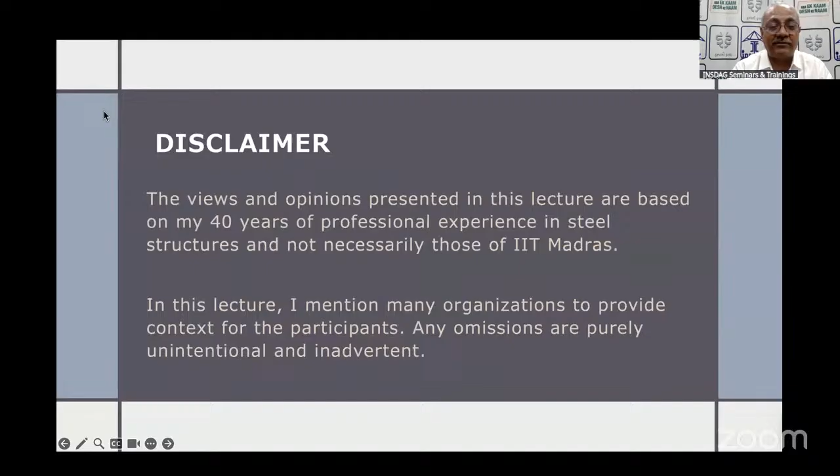Good evening, all the participants. This is INSDAG's 29th year of foundation. During this foundation, we celebrate it with a popular lecture. This time, our presenter is Dr.

Arul Jayachandran. He is a professor at IIT Madras. A little bit of his CV: Dr. Arul Jayachandran obtained his MS and PhD from IIT Madras for his research on the computational stability of steel structures. He worked in CSIR-SERC Chennai for two decades as a scientist in the structural steel laboratory. Then in 2010, he joined IIT Madras, and has guided 16 PhD and 5 MS students on steel structures.

He was a visiting associate professor at Georgia Tech, USA, a visiting senior fellow at the University of Wollongong, Australia, and on sabbatical at SUNY Buffalo, USA. He is on the editorial board of the International Journal of Advanced Steel Construction. He has published over 100 papers in international and national journals and conferences.

In the BIS committee, he is the convener of the revision of IS 800:2007 and IS 11384, limit state design of steel concrete composite structures. He is a member of the design team that won the NHAI Silver Lotus Award for the all-steel flyover at Marathondam. He won the ISTRAC Outstanding Designers Award for designing the Madam Jayalalitha Memorial in Chennai.

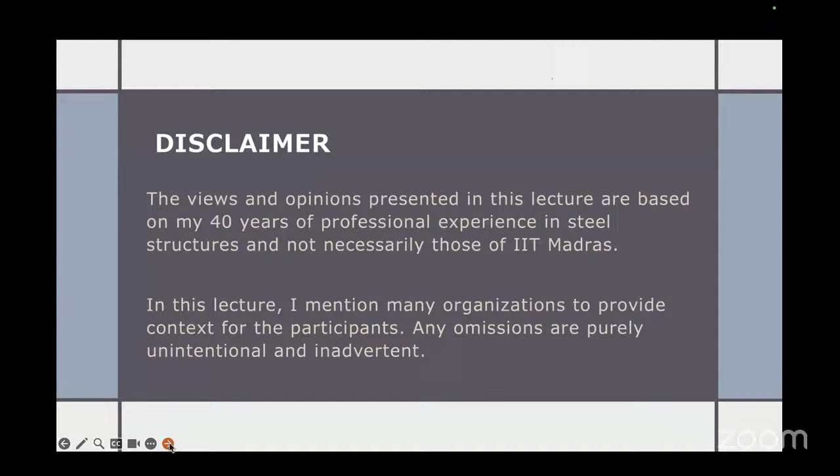Ghosh, all set? Everything is there? Is my slide moving? Ghosh? Yes, sir, it's moving. Okay, sir, you can start now. So sometimes I'm talking to the screen, so I just want to make sure that I'm audible and everybody is.

So first of all, this lecture is made to be more educative to the engineering community, the designers, the engineers, the students participating. I feel even engineers who work in big companies in our country lack a pan view of the whole industry. They do not know where they stand, what the aspiration of the country is, what they are working for, and what the big picture being followed is.

I'm a great fan of Professor Devdas Menon. He used to deliver a lot of lectures to us, and he told an anecdote he had read somewhere. When the Taj Mahal was being built, people were all cutting stones. A passerby went and asked one guy, 'What are you doing?' He said, 'I'm cutting stone.' Then he went to another guy and asked the same question. The man replied, 'I'm building the Taj Mahal.' Although he was doing the same work, he had envisioned what was going to be there. My point is that many young engineers who work do not know their coordinates.

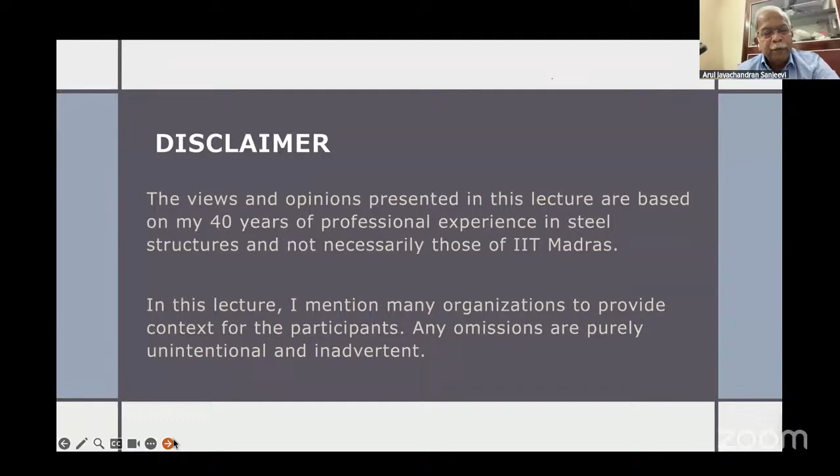Secondly, I might use names of organizations purely for putting context to the people. If I say L&T, then people know how big the organization is. So if something is not mentioned, I would just want to say that it is purely an omission, unintentional, and I ask your pardon.

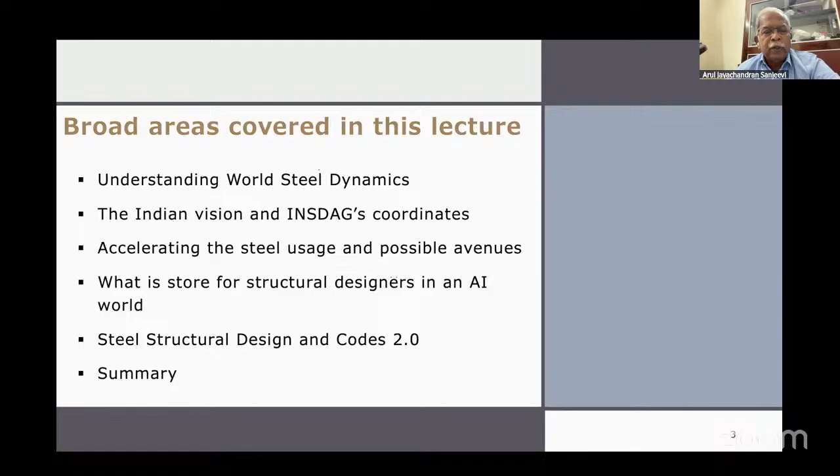I would like to have not too many topics, but a broader picture of what the industry is going to do. First, I thought I will help you understand the world dynamics, and what is India's vision, and whether a possible acceleration of steel usage is achievable. Of course, the point on AI we will discuss at the end, and what happens to the codes going forward.

Okay, so understand the steel dynamics. Is it visible now? Can I go back and have another look? Probably the one I'm showing is not the one I intended. Can I stop sharing and go back? Certainly, sir, I will stop share. Let me go, please.

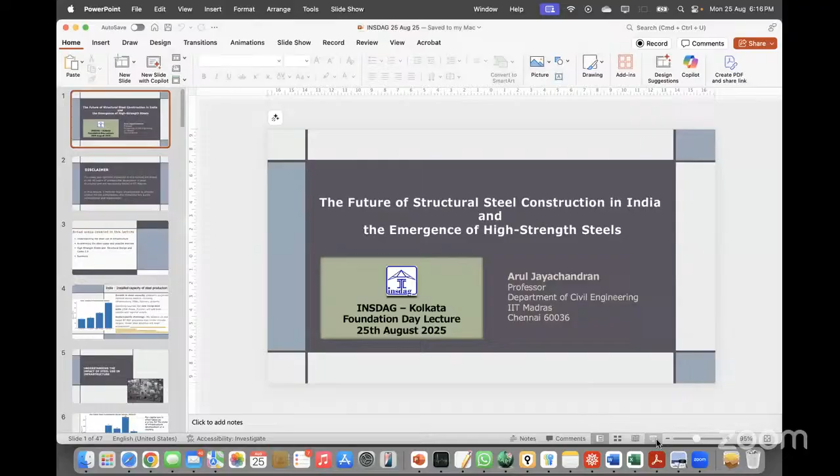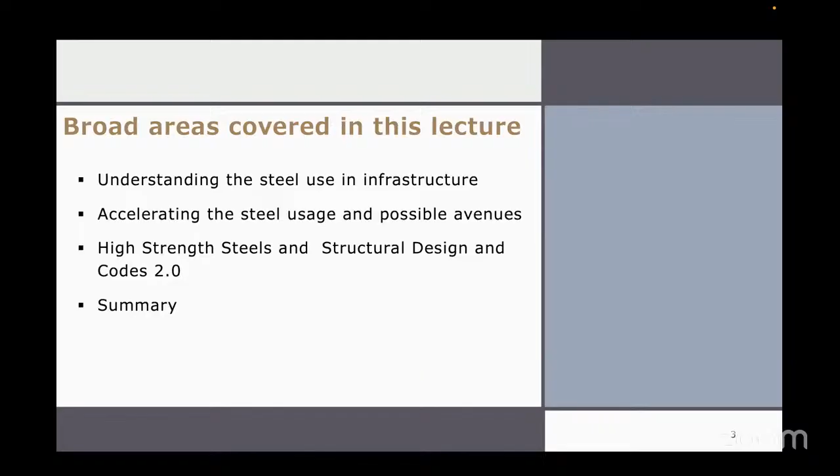Very sorry about these things, I had too many versions of the presentations. So first is understanding the steel use in infrastructure. Somebody has to mute. Okay, secondly, accelerating the use of steel and how high strengths and the new codes of practice come in, and finally the summary.

Now, what is the installed capacity of India? We always want to grow. Right now we are at about 200 million tons per annum capacity. When the demand comes from housing or infrastructure, PEBs and the like, the production is going to be high. We also see new ones being planned, like the JSW POSCO joint venture.

But one thing is there: we always go by the BF route, the blast furnace, basic oxygen furnace process. When I visited Scandinavia, I don't want to name the country, but they are producing what is called green steel, which India is also doing many initiatives towards. But what worries me is we have developed to a great extent in the BF and BOF process, and we are almost self-sufficient in production.

I'm really afraid that any climatic issues may lead to non-trade conditions coming into our steel industry. I know the country as a whole will confront that, but I'm a little worried we have to gear ourselves up for an eventuality of things related to climate, either in trading or use of steel. India must be ready within another 5 to 6 years. That's my personal opinion, because people are going to comment about the BF and BOF process, and we have enough potential, so we should get into that.

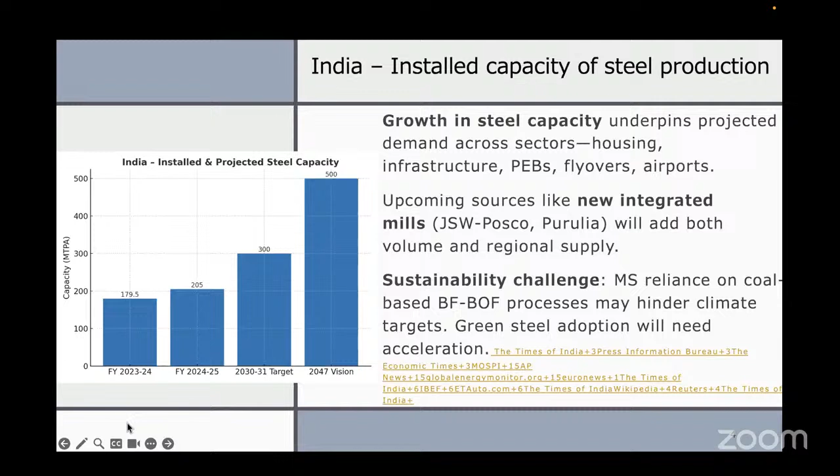Why do we have an obligation to be with INSDAG towards our country? Those are things I want to say.

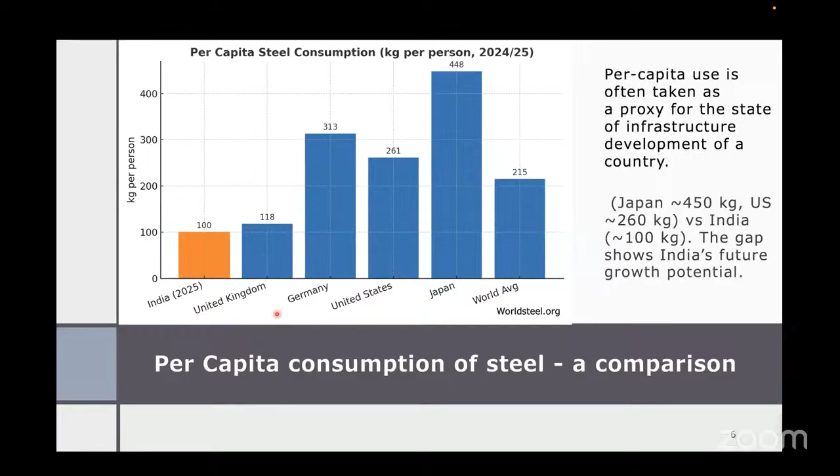Having given a little idea about per capita consumption of steel, there is common acceptance that every country who wants to sell more steel has specialized networking organizations. I wouldn't call it an institute, it's not an academia, it's not a group of scientists, but it is a passionate kind of people who are really interested in expanding steel construction and the aspiration of the country. If you take Europe, the ECCS is very, very strong. There are some steel producers who have their own institutes, but still the European Convention for Constructional Steelwork provides a lot of conferences, material, and the codes of practice support material, everything.

Of course everybody knows about SCI. In the 1970s UK went through a crisis very similar to what India went through in the late 90s, and so they systematically went and formed the SCI, which today has grown big. In the past we have worked with SCI, and I'm sure we'll be working with them now also. Of course BCSA has a little historical background too. The American Institute of Steel Construction - amazing people - is primarily run by the fabricators and the steel producers, and they do very systematic work. We also have the Canadian Institute, the Australians, the Chinese, and the Arab and Middle East Union. So there are specialist organizations that integrate the industry.

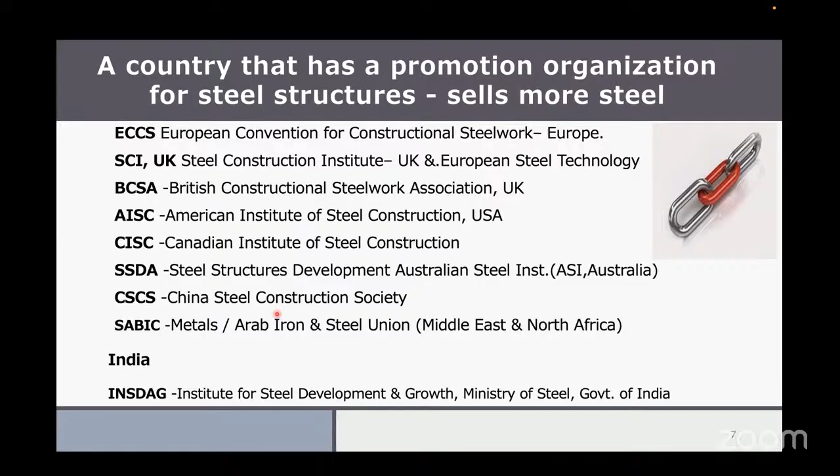In India, we are fortunate that from the mid 90s we have INSDAG, the Institute for Steel Development and Growth, under the Ministry of Steel, Government of India. Primarily this is an organization which has the wherewithal and capacity to reach out to the masses, from different stakeholders - may it be designers, end users, fabricators - all can get something from INSDAG. So I would say INSDAG has been a great organization, and it is my duty to mention that.

And also I would like to show you the graph - this is per capita consumption of steel. When we started in 1991, it was something like 3 or 4 kg. This data shows that we are at 100 kg per capita per person now, but we were like 3 before.

Around 91, 92, India moved from an administered pricing regime to an open market pricing. That means earlier, the price of steel was a regimented one. The government had a few organizations who would calculate how much steel is produced and how much is the demand.

So they fix the prices. There is no proper, I mean, the real market push-pull forces which come into it.

So later, INSDAG was formed in 1996, if I'm right, and it is there for us to see that there is a great growth after the inception of INSDAG, and we have now reached about 100 kg per capita. I'm not attaching the entirety of this effort of the steep rise to INSDAG alone, but I would like to make on record INSDAG was an integral part of government's every step towards that.

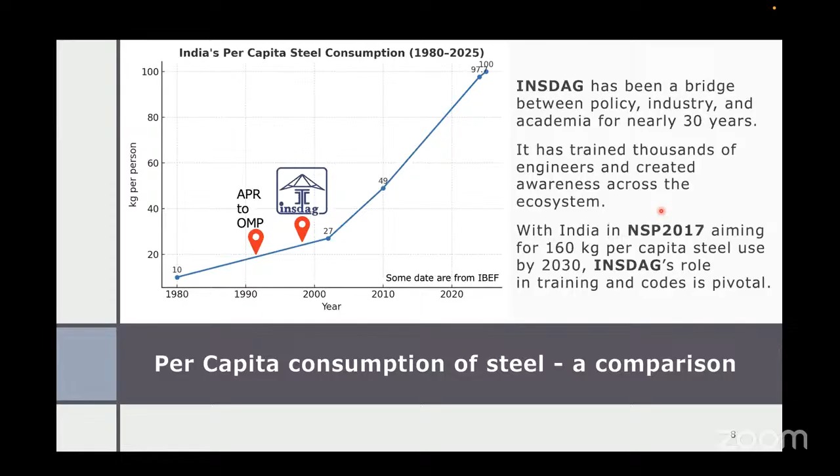A little bit about the people who were young then have gone through INSDAG. It was established in '96 when there was a very low uptake of steel, and we went into the open market in steel policy, and the need for a specialized organization was felt, and INSDAG was formed.

I'm very happy to say I'm one of the founder members of INSDAG. The first DG was Madirata, and at that time, Professor Narayanan from SCI UK was here, and Mr. Narayanan from the Steel Ministry was guiding INSDAG through Madirata, who contacted Professor Narayanan from UK. Narayanan put together Kalyan Raman, myself, Professor Shanta Kumar, Dr. Sita Raman, Professor Satish, and Dr. Sendil — he made a team, and we did the initial work.

So the early outreach by INSDAG for awareness of architects, popularizing steel construction manuals — all these things, we were very happy to be part of it. I have seen many young engineers at that time, at my age, and we used to run around.

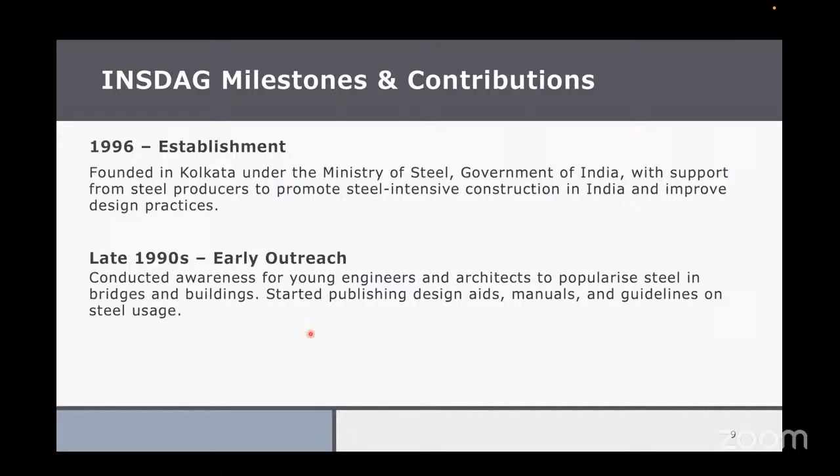Once we were going for a lecture to Coimbatore, near a place like Coimbatore. I was in the train, and Manoj Ghosh came and searched my compartment to make sure whether I was available. So we had fun traveling and teaching and creating awareness.

In the 2000s, it graduated further because composite construction came in a big way. There was awareness about IITs and CSIR labs, and INSDAG started coordinating with them. After that, in the 2010s, they started having their own design books.

First of all, we should understand — they have all the wherewithal to collect all the technical information and disseminate it to us. So per se, we say there is some technical excellence available. Is there? They are people who can get your expectation of technical excellence from somewhere, right?

In the 2020s, they did lots of seminars and worked on prefabricated and modular construction, and they were also part of discussions on smart cities and affordable housing — I will come to the point on this. Every year they conduct a competition for architects and engineers, which is very popular.

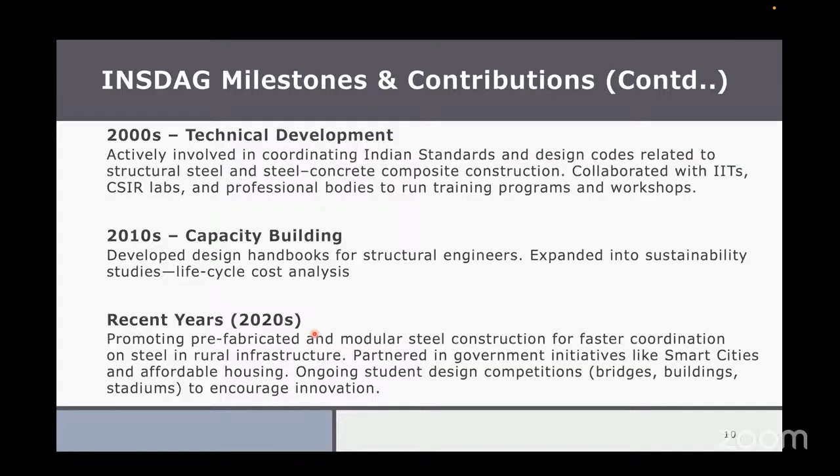My students have twice won — one of my students won first prize as a single entrant, and another three students got the third prize. It is very popular even among students. Kudos to INSDAG, they still maintain it because this is a difficult logistical exercise, and they have been doing this.

So there is my own introspection about INSDAG. I would like to say it is an organization started as a promotion for steel construction. Initially, it fell into some crisis of identity because some of the patrons were looking for their own benefit — is there any increase in sale?

It was too early for INSDAG to have taken that burden. I was also part of it, which says, oh, one day we will do it. So initially, it was on the expectation side. Secondly, INSDAG was seen as a solution provider. But even in IIT, we don't have solutions to all the problems of stakeholders — neither does INSDAG.

But they, as I told you, they are capable of getting that information for you. So I was sad once even INSDAG was pushed to take up even design checking, an organization pushed into design checking, which was too much for an exec. So I would say, as an outsider, those were the things we were really struggling with, INSDAG helping and things like that.

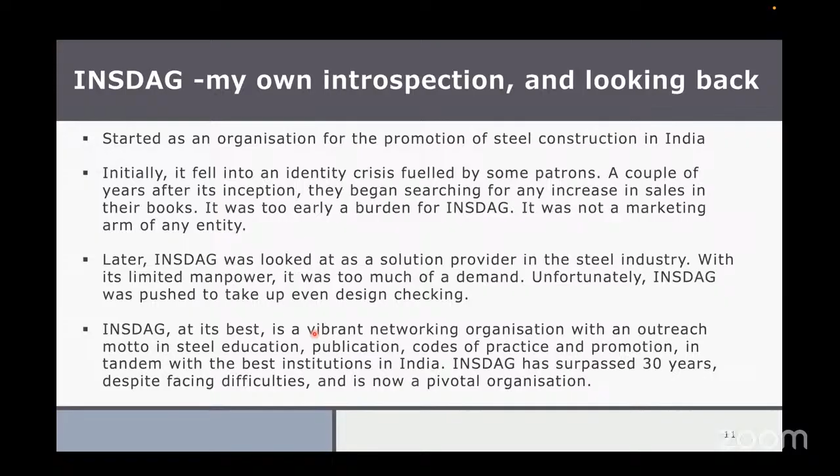Now everything is fine. We are doing most beautifully. It is my opinion, and now it's a vibrant networking organization with a motto of steel education, publication, codes of practice, and promotion. So, in tandem with the best institutes of India, they're a big mover of steel construction in India. Now they have surpassed 30 years, despite facing difficulties. Now they are a pivotal organization.

So, Misra ji, I give my claps. Congratulations to your team. I could see this picture put together - I see my old friends, Manas, A.K. Samantha, Arjit Guha, and of course I don't find the other names there. A wonderful team doing really good work. Your vision is to make our country great, and it's definitely my big congratulations to INSDAG, and I'm honored to deliver this talk. Thank you, Ms. Raji. Okay, thank you sir, thank you sir.

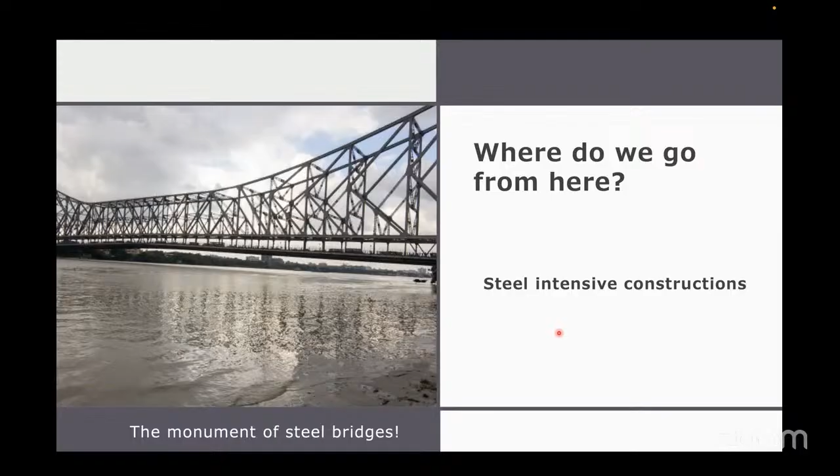I had the big fortune of walking its entire length - we have a small cabin monorail under the deck so we can go into it. So it was a very nice exercise, I went down. So the question still links: where do we go from here? Because what is in store for us?

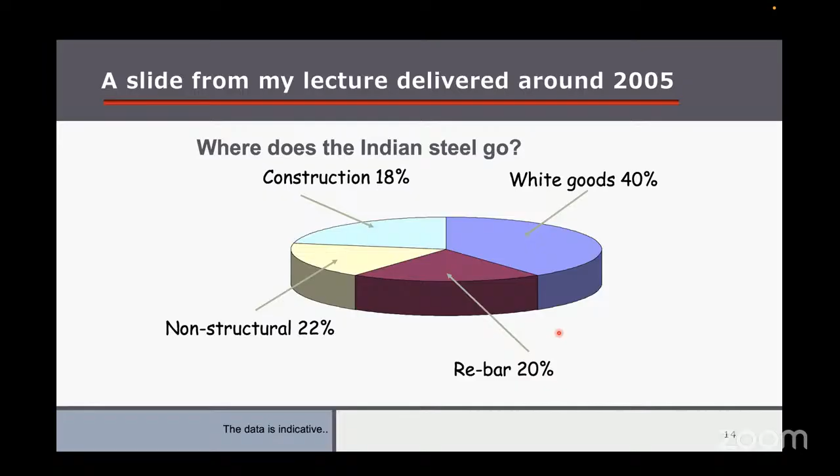But today, the steel consumption we are looking at for 2030 is a whopping 62% from construction and infrastructure. You can say the 10% automotive is there because the pie has become very big - the pie has become very big. Of course we should be doing more on defense, but this is our future for 2030.

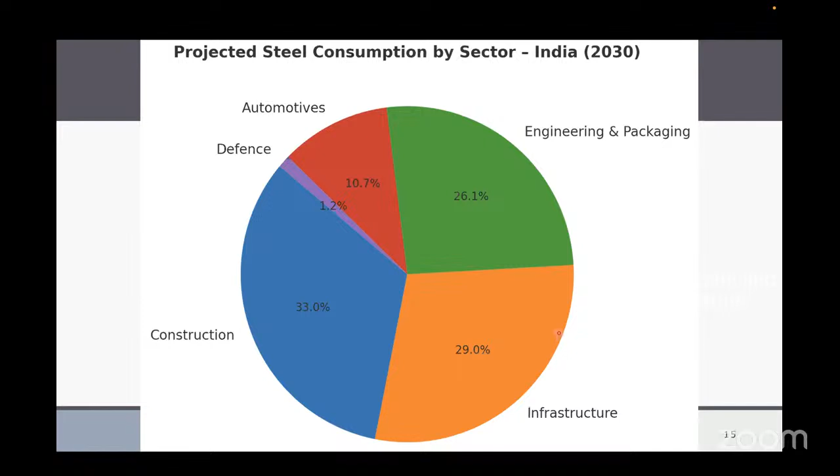Definitely, we can always work and coordinate more on the defense side. So this is a big, big leap from 18% to about 62%, about 4 times that. So what do we have to do - that's my question. In my own opinion, I'm not saying I've solved the problem of the world, but I can give my professional opinion of what can be done to bridge the government of India's big aspiration and leap in the usage of steel.

Okay, so this is black and white, right? The grand challenge in steel construction ahead of us - the national steel policy is set. As you can see here, it aims to go around 160 kg per capita. So that's from 100, another 50% increase. Now, how is the roadmap?

You might have read about Gati Shakti, which has 7 engines that drive growth. And if you break them down for the steel sector, it's very nicely laid out. If at all we want to grow to around 160 kg per head, then our first priority is construction and infrastructure, engineering and fabrication, automotive, and packaging. There are minor contributors, but the major chunk comes from construction and infrastructure.

Now you can see here, it starts with steel, oil, highways, bridges, airports - all of them have to contribute to that, because this has been arranged not just as an enumeration, but in a thoughtful way.

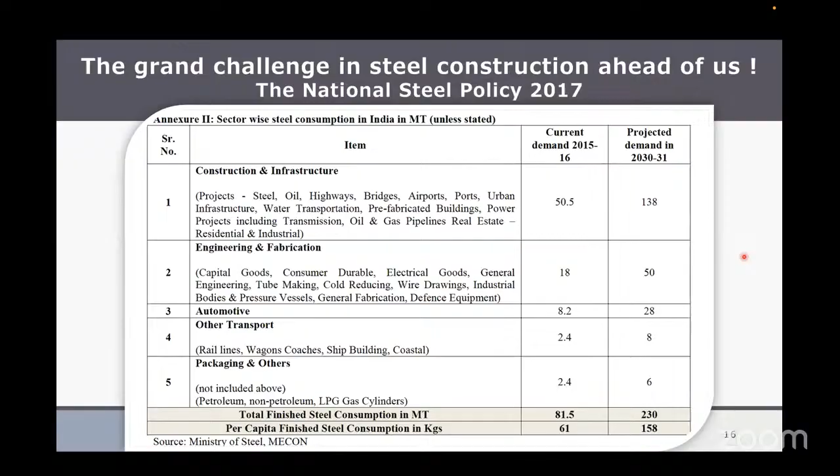Let us see one by one how we can do this. My first question is, can open web steel girders or plate girders increase steel consumption? This is the first question, because the die is cast—I know where to go, but I have to find how to go, or what else I need to do.

Now, if you take open web steel girders and plate girders, it's primarily used in railways. They were the major consumers of steel for a long time—in the British era, even after that, even after independence, and we set up several steel mills by government funding.

After that there has been big use of steel in railways. Now my question is, can the same thing boost our consumption? I'd say the doubling of tracks, which is announced in every budget, and new alignments, if adjusted and funds allocated, only those increases can bring in consumption of steel. So probably most of the rolling or track stock is in a stage of maintenance, but new things come only if there are new alignments and doubling.

But one hard truth we have to accept: prestressed concrete has definitely been used as an alternative, in many instances—not just one or two. In such cases, even for the ROB portion, steel is considered most of the time—either as a plate girder or as a bowstring bridge. These two are the options being used.

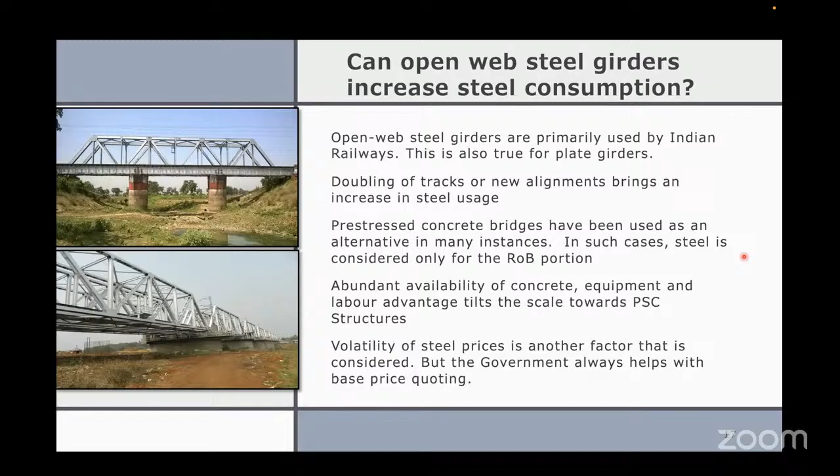Another thing is the volatility of steel prices. People always talk about the volatility, but in a government project, it comes with support—you do base pricing and then cover the markup. So there's a bit of smoothing, it's not all that negative with steel being used. But I'm not very confident that the open web girder systems used in railways are going to bring us more consumption.

Secondly, my question is, can industrial structures increase consumption? Industrial structures are basically synonymous with steel only—concrete being part of it, but mainly steel at every instance. They have some constant share of steel being used in industrial structures. So unless we get new industrial conglomerates with heavy usage of steel, we're only seeing a few at this moment. So the point is, industrial structures do use steel, but will they drive the demand?

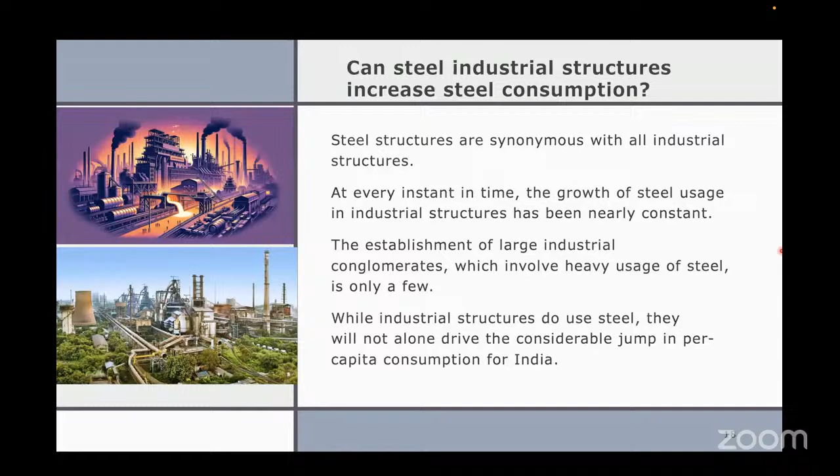I would say no, or the possibility is very low. Industrial structures only come up when there is capex and companies want to invest, and industrial is not a big driver of that.

So the third question is, how about the PEB industries? I am really excited about these PEB industries. They're doing really well. I've been part of this PEB industry for nearly 25 years. In the year 2000, we had a conference in Chennai, and at that time I first saw Kirby people and the Australian Tata Blue Scope, though it was a different name then before they changed it to Blue Scope. They made a presentation about pre-engineered buildings. I still remember it was about 100 people. From there, after Kirby landed, we have widened, and the PEB industry has been a big promise for steel growth.

So if you take the current market size, it's about 1.84 billion US dollars. By the year 2030, if you project it, it's going to double. Definitely, because the reason is they are not just enclosures.

We can see the seventh engine, our Gati Shakti, which is the government of India's long-term infrastructure powering plan. The seventh engine is logistics infrastructure, so the drivers are warehousing. Now there's a very interesting concept in warehousing - not everyone has to have their own storage. There are common storage spaces given on rent. The aggregator of services will provide logistics of putting in and getting out, and you can share the space. This is very exciting for me, because a person who produces need not have a space of his own. This is a new concept.

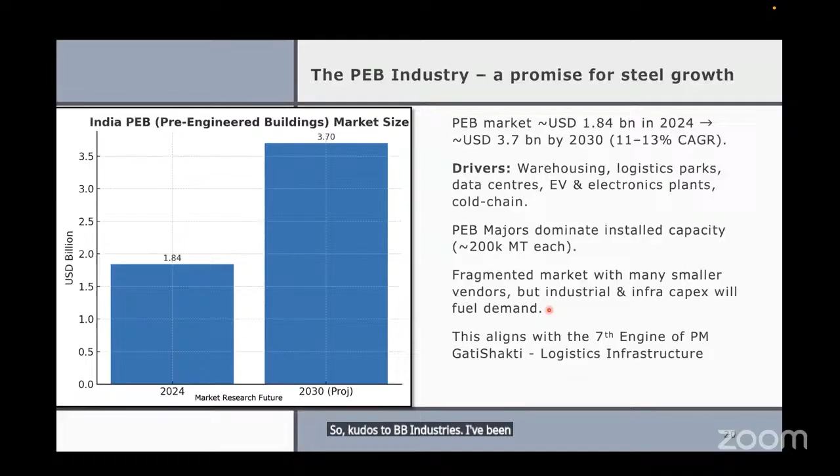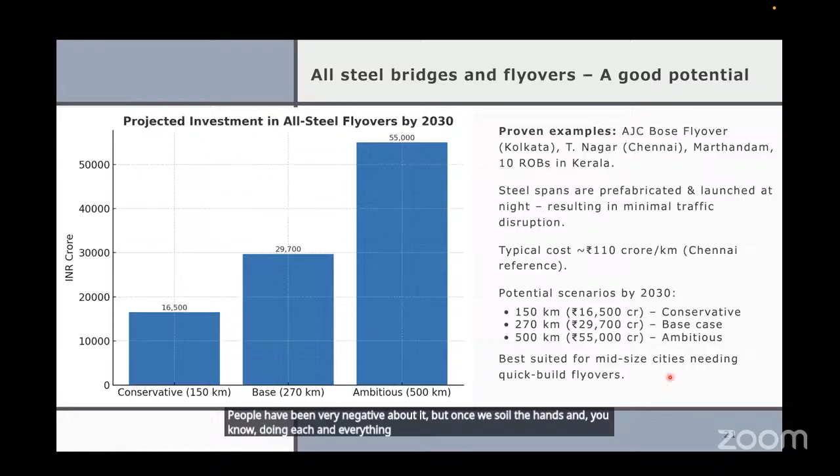You will see in a while. When we took up the challenge of providing a flyover in a very narrow space, people were very negative about it. But once we got our hands dirty doing each and everything, we really understood it's a good concept that may be adopted. Let me go into that concept.

This is the first photograph we took, I think from the Hooghly Bridge River Corporation, correct, Mishra ji? Is this the organization? I took this data. Is that right? Yes, sir. The name is Hooghly River Bridge Corporation. We went and fished through all the old documents, and they're very fantastic.

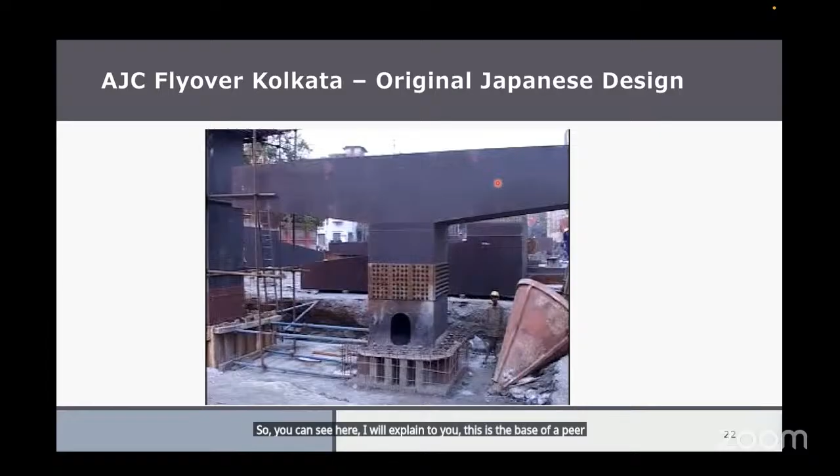This is basically a Japanese design. You can see here, I'll explain: this is the base of a pier, and the pier cap is in steel. This is the AJC flyover. What amazed me is that at that time, they had a plate girder - this is a steel composite bridge.

And for the obligatory span they used a box girder composite, Mishra ji, am I right? It's still, because this is an old photo and I took my own photo, the place is still buzzing with activity. Yes sir, it's completed now, long time back. This is a construction photo. So this is our inspiration.

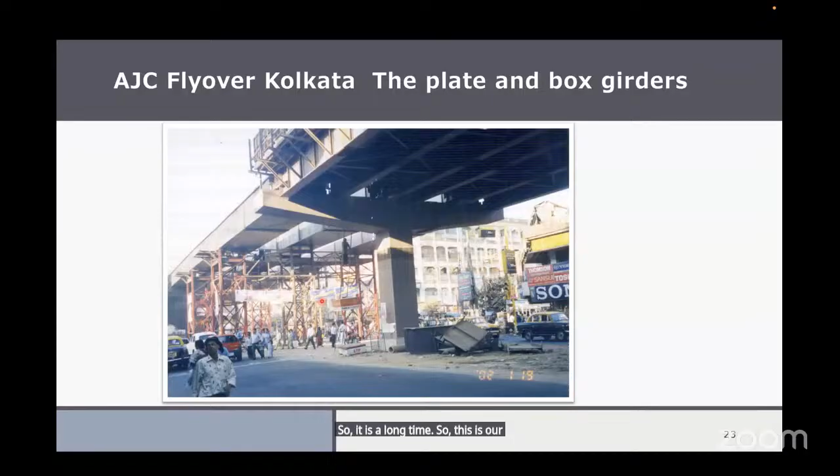We learned that this flyover was designed by Yachiyo Engineering Consultant, and L&T was the EPC contractor, with the superstructure using a box girder or prefab girder segment.

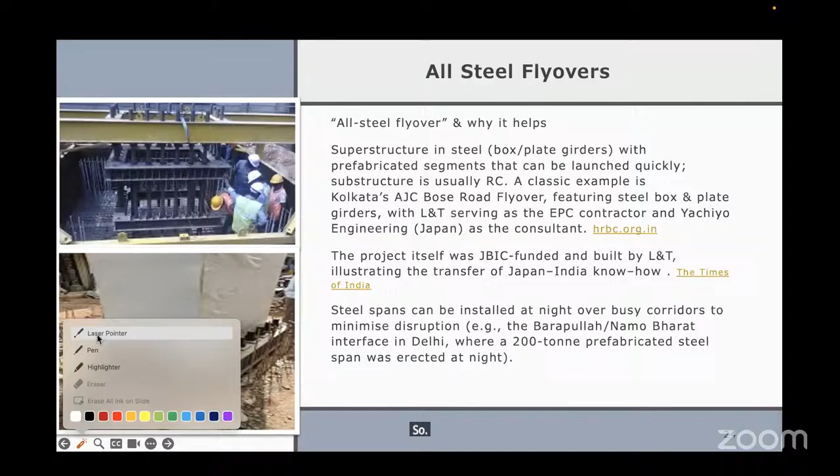Let me explain how this concept is viable and how it can be used. This is the space where the pile cap comes, and inside the pile cap we embed what is called an anchor frame. The concept of the anchor frame is very simple and ingenious: there are rods with a nut here, the rods go from here down to the bottom, where there's another nut, and it extends up to the top.

When we fill it with concrete and there is a downward compressive load, the top nuts transfer the load. When the load reverses, the bottom nuts transfer the load onto it, and the load disperses accordingly - if there is an uplift, the load goes the other way.

This is embedded into the pile cap, and you can see there is a small frame coming into the pier cap. These are the anchor rods which are projecting out. The diameter is about 80 mm, sometimes we have used 90 as well.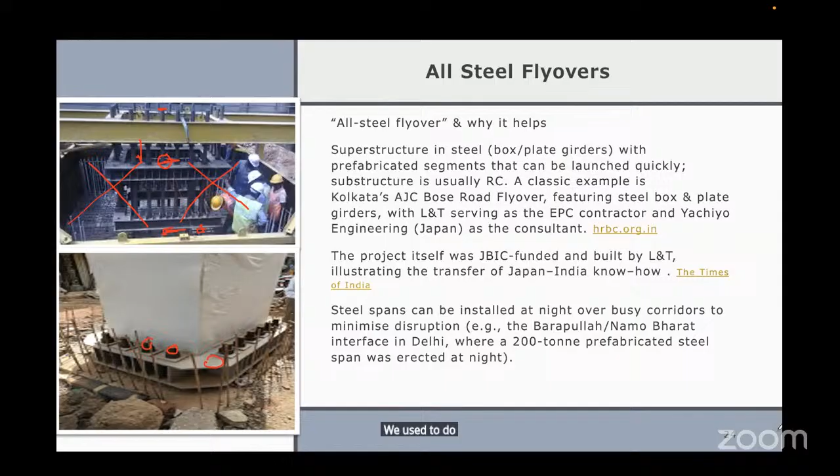This is an example you can see here. This is the pier, attached to the anchor frame. Once the pier is made, which is of steel, the entire area is usable - at least two-wheelers and smaller vehicles can go, and even lorries and buses can go, with minimal disruption to economic activity.

So first we block the road for the piling. Once the piling is done, the anchor frame is cast. Once the anchor frame is cast and cured, we place the pier, and that's it - we remove that place for traffic.

Now the pier cap will come in. We have a handhole in the bottom of the pier cap, so it is set, and the bolts are inserted and torqued to the right value.

So it is a very simple operation, and it can be done with low weight cranes. In a day, you can do about one or two. The initial bolting is done, and then we go torquing.

What we have done in T Nagar is just going to be over. It starts from CIT Nagar and will end at North West Mount Road, where Dr. N. Subramaniam's house is - sir, we have a bridge from CIT Nagar to your house. Also Marthandam, and Kerala had 10 flyovers given by RBDCK, basically funded by KIIFB. All of them are there, and the last 4 are being released.

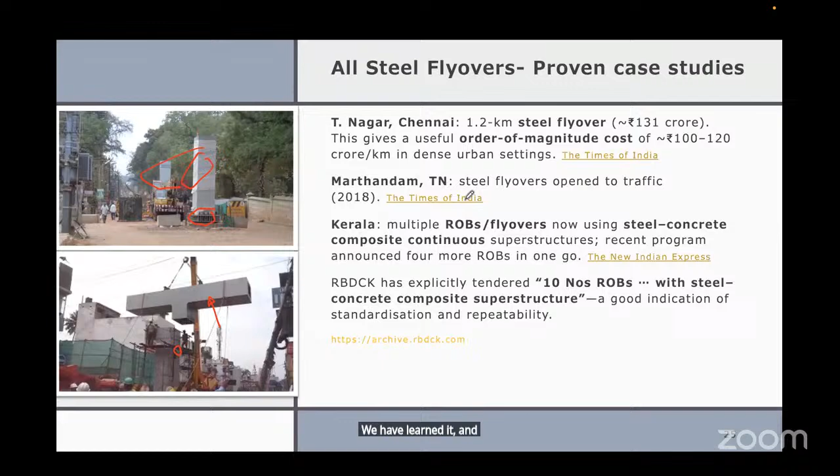So the concept is well tested. We have learned from it. Right now, after this, only plate girders arrive - it's not basically a stick construction with stone. The girders arrive and go on top, arrive and go on top. So it is very easy to construct by the stick method.

For example, in the case of India, suppose if we think this is an option - India has about 4,000 cities, and in India, the urban population is going to be about 607 million. So tier-2/3 cities will definitely need upgraded infrastructure.

Right now, a lot of second and third tier cities are there. Let's say we target about 75 to 100 mid-sized cities - tier 2, 3 million plus cities - which may need 2 to 5 kilometers across 1 to 3 bottlenecks. So we are targeting only a few of them. Then if we take the estimate of 110 crores per kilometer, which we took Chennai as the base.

Different costs can vary. If the adoption is say 75 cities, we have a capex of about 16,500 crores. An ambitious estimate is about 55,000 crores - this is my own estimate. Of course, the variability of adoption and acceptance by the municipal community are all there. But since it has been tested a few times, I did calculations on whether it is possible - of course, it works, it is possible.

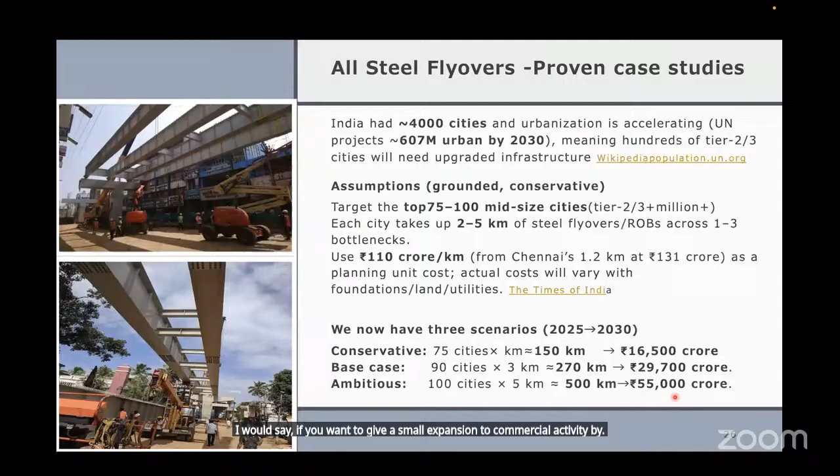It's not the flyover cost alone, but you see how much increase in economic activity or benefit to people there is. For example, in the case of Marthandam, there used to be a traffic jam about 2 hours every day and every night, and people going from Marthandam to Trivandrum in an ambulance always felt the difficulty. After the flyover came, it is hardly 20 minutes to cross the entire thing. So it is heavily populated, and I would say if you want to give a small expansion to commercial activity through access, the business development around that is more.

That's what is my hypothesis, but of course there are some caveats. I too agree, sir. Yes, sir.

Just wanted to know, what is the steel consumption per kilometer? About 1,000 tons per kilometer. Can we take questions at the end? Thank you.

Hello? Sir, whose question was that? Participants, let us wait. Let us concentrate, I plan to give about half an hour, sir. Sir, don't worry, I'll finish it in time. We'll discuss all the practical things.

Because finally it's all about costing and design technologies, I can say. Of course, most of the time you have to have clear corridors for that. So the ROW, if the municipal administration is excellent, it is excellent. However, if any land acquisition is there, that particular stretch alone will take time. But if the ROW is there, it's a fantastic concept. If the ROW is with the municipality, it is very simple.

The only thing is life cycle. Everybody is always worried about corrosion, right? Now if you go and see the way we detail all these structures - I can say the flyover that we built, the post-construction liability was 5 years. So the contractor paid zero paisa. There was absolutely nothing needed till the 5 years, and then it was transferred to the government. So I will say the way we detail, the way we reassure people, durability is not a problem.

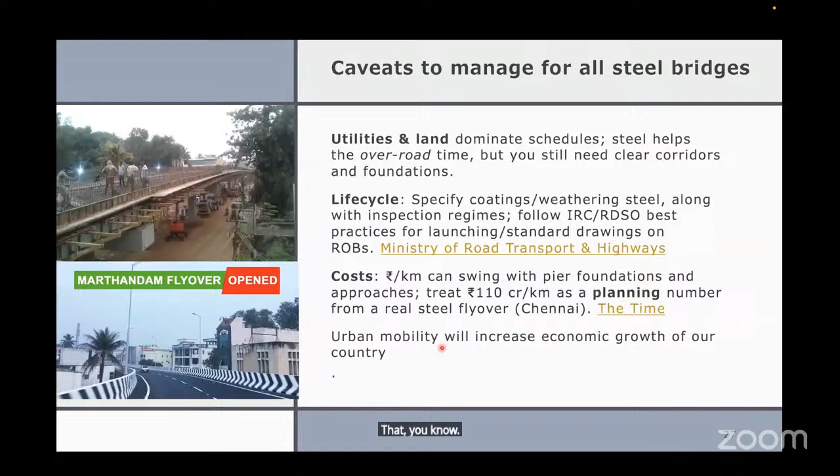Of course, there are ifs and buts. So this is the flyover - you can see here it was a very, very narrow road. You can see here from the deck, people can go into that balcony. And once the piers were in place - that was 5th of January - and it was completed by 19th of December, all open to traffic.

So this is one of the fastest. The entire stretch was given as 2 packages, and both were completed in about 12 months. There was a central minister who wanted to do this - it was there, so it's only an example. Of course, there are people who have a lot of questions, a lot of alternatives. So I'm only saying something we just tested, we can see whether it works.

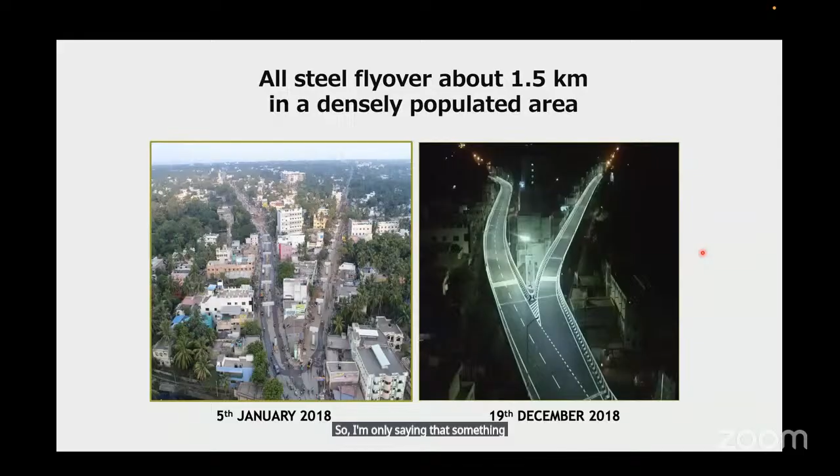This is what I said - the flyover program. Look at here, if I take 150, then if it is low steel usage versus mid and high, you can see here how much is the tonnage. So it's about 1,200, and the max is 2,400.

So this is all our theoretical value. For example, if we are going for a 2-lane, this is what we have the cost for - 110 crores per kilometer is for a 2-lane. If you want to go 4-lane, then the cost may differ, and it will become more steel intensive.

However, if it is going to be an airport access, the return on investment on the tangible parameters is very high. So this is a study that we have done, and of course this is in tune with our government's Gati Shakti - absolutely in tune with how we can give urban mobility and decongest our traffic with more flows. So these are part of the pulse of the Gati Shakti. This is only a proposition, a hypothesis, and we can try to achieve it.

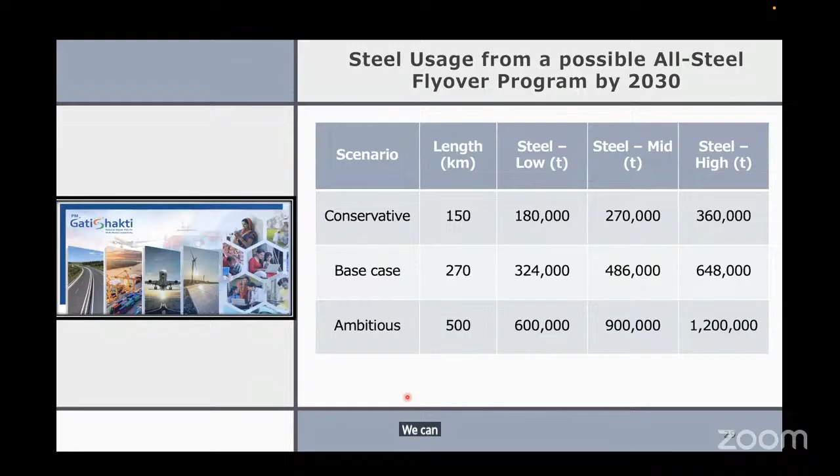Okay, so I think I've dwelled on this topic very much, but I'm very glad to see this all-steel elevated corridor in Sri Lanka.

So it was an orthotropic deck. Probably a Japanese design, I don't know, but it was very beautifully built. All the portal piers are in steel, very elegant, and it takes very less space.

You can see there is a lot of space for water drainage, and then we have a clutter cover, and you can see the individual piers also. Correct. So very nicely done.

Of course, it's a green field where there is no big disturbance, so they were able to go for portal piers, but definitely it's a good concept. So I'm only encouraged to think - innovation is what this will make us. Anyway, this is my own personal thing. It is possible, and we are capable. We have stalwarts here, our government is very supportive, and we have to do it.

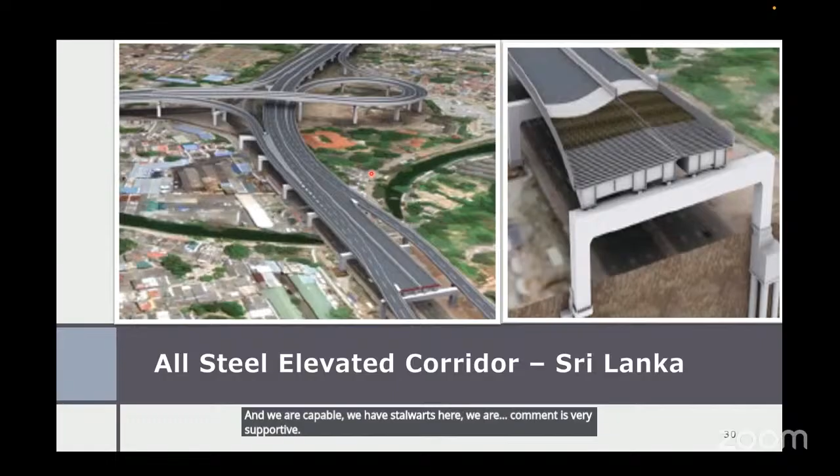Okay, fine sir, so next I go. In the bridges side, if you want to use more steel, I thought okay, there has to be - we can take away concrete or pre-stress, we had to have new avenues. So that's what I said.

So what about airports? See, airports are real good in terms of intercity transport, exports and things like that. However, by 2030, we say this can be there - can be a low use of steel, base, or high use of steel.

So what we have done is we are talking about the first 8 being new big airports. In the low scenario, at least a minimum of 8 big airports, the base is about 10, and high is about 12. So these are new airports.

The second number is the mid-size airports, like the next tier airports - about 27, 40, and 48. This is purely on a statistical scaling basis. And then these are the expansions - the last one is expansion.

Either with another cargo terminal or another passenger PTB, things like that, we have worked out. So we are of the opinion that a mild increase can come, but this increase will result in higher exports and intercity economic activity.

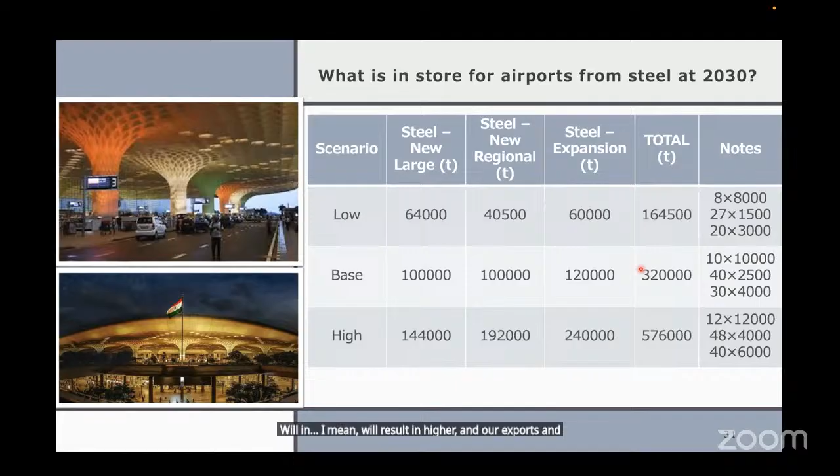The next point I'll take care of is housing for India, which I've been very fond of. So today, we have about 10 million units we are short, and by 2030, we have to be short about 30 million cumulative homes needed. And what is surprising to me is a whopping 67 trillion rupees economy.

So it is a very, very good scheme. But let us see what is that prevents us from going in a big way into affordable housing. But the government is doing good.

Under the PMAY-U scheme, the government has sanctioned 120 lakhs, and they have completed around 94 as per the Press Information Bureau. And there are 1 crore urban families also targeted over the next five years, that is by 2030. So this shows the scale of things is high, but still a backlog persists.

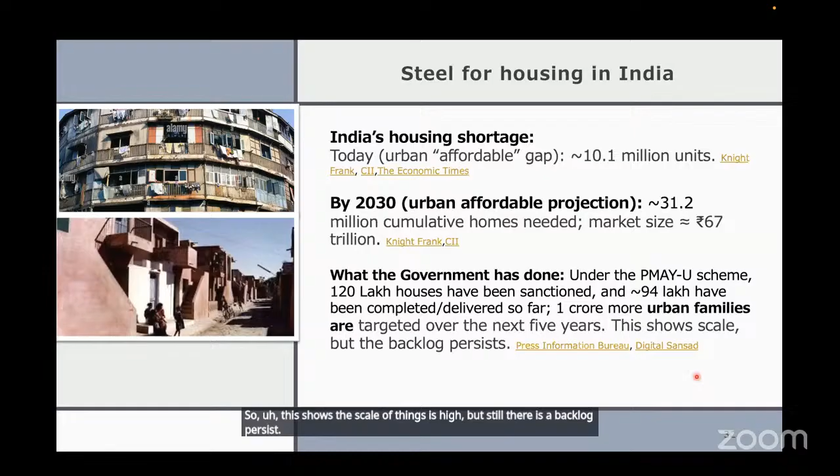So what is in store for steel, right? So I would say, I'll share my experience. Of course, these figures are to say that steel buildings, cold form steel buildings will be for upper class also, with the experience I've seen in Australia. The cold form steel, the LGSF system, is for the uppermost strata.

People want palaces built because they are near the mines and things like that. So there is a beautiful technology which provides cold form steel for the ultra high things. But however, we are talking about the cold form steel or light gauge steel frame systems.

We did projects at Guwahati. Chhattisgarh was a great success - it was 48 different tenements for the laborers. That was the first time, it was on a very experimental basis. So in that cold form steel house, Indian toilets were inserted. It was an amazing

effort by Jindal, and it was really done. And of course, for Kerala also, that 418 BPL, below the poverty line, dwellings were also there.

But let me share the honest truth. Whatever the engineers always thought on, was not on the livability. A house that is completed and given to somebody - because people have to live, people have to live. So probably the ones that were presented could not think of it as a place for living, and where will they keep things or cook. It's not a simple enclosure that we get in the case of data centers or PEBs, where we give an enclosure and say you fill it with whatever you want.

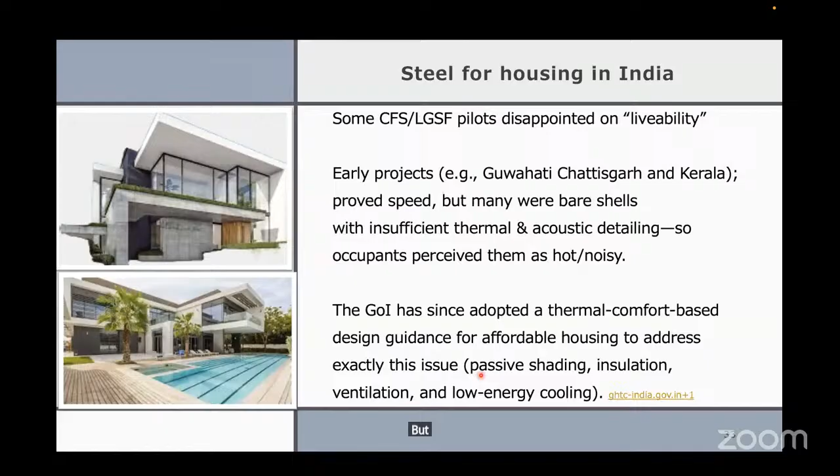Now the Government of India has taken note of this and made guidelines to provide livability. Of course, there is always a push-pull between cost and livability. But people think - I'll come to the point now.

I say pitch the product and not the material. Of course, we are going to deliver on steel, but in hundreds of cases, I felt that comfort was not the priority - only the materials were. That's why I put the phrase as pitch the product and not the material.

So we have to do something about this. Some of the things we talk about are the wall studs, the walls, thermal-bridge breaks. This concept can really customize things for people with different demands, allowing them to have their own systems.

Then we talk about rooms, and we even thought about how the spacing should be so that fans can be attached to the metals, because normally in cold form steel beams there's nothing to hang loads on. Then acoustics - a reasonable level of acoustic protection has to be there. And of course, corrosion protection.

The cold form steel products already come with an impregnation of galvalume or zinc aluminum, about 275 GSM. But still, it is our duty to assure the customer that it is corrosion free, so we have to make sure there's some kind of coating, especially in wet areas.

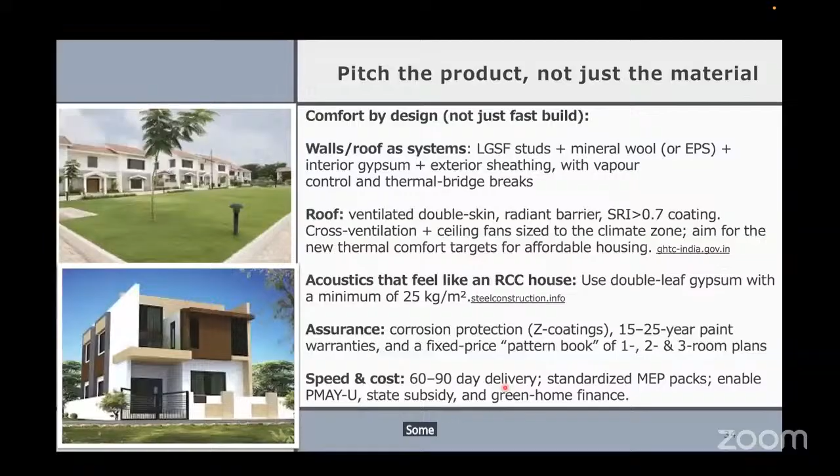Primarily, I would say steel housing by 2030-31 million. Now, a typical size, let's say 35 square meters - the frame intensity is about 20 kgs per meter square. We are using 20 kg, so we say 0.7 tons per home, which is very low.

I do agree, but the reason is whenever we ask a structural engineer to design a house, he weighs only the amount of steel that is computed. So his BOQ is only kg of steel. In fact, if you take an individual house, or let's say a resort, if you're building a cold form steel house, the frame cost is hardly 30%, because that's just the steel frame cost. Then you have the enclosure material, the flooring material - what is the cost of comfort? So you can see the share of the frame cost is not that high compared to that.

So the remaining aspect only comes down to livability. So what I thought is, when we present to the customer, it has to be an integrative approach. Otherwise people will think steel companies can only sell you their steel.

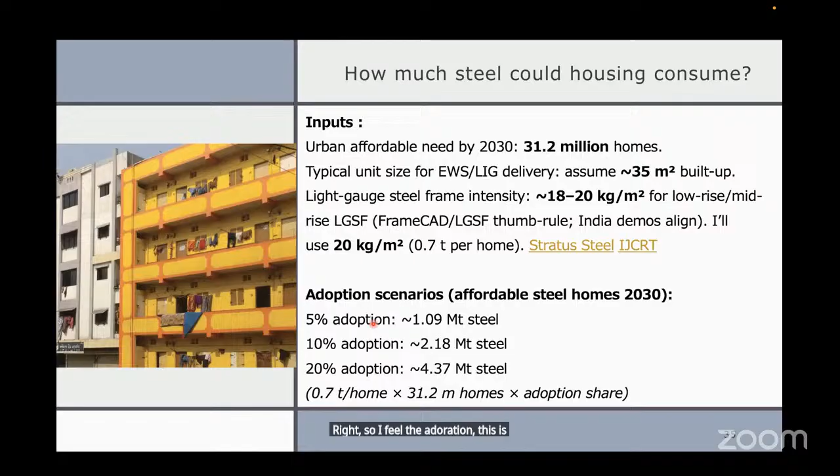Of course, it needs a lot of concerted effort. I shared this about 6 years back with structural engineers who are designing. I say customer is the king, however poor he may be, because he decides whether you give him a house and say 'go live' - they will just live under the tree and not in your house.

So many people think - there was a design I saw for a rural home, and the plan had a living room, a bedroom, and so on. It broke my heart because the engineer did not understand the intent of a person who lives in a village. For him, all space is the same - living and sleeping, everything together. So I would like to give more carpet area and a place at the top, with a triangular truss roof - which is difficult in cold form steel - so he can put many things in that triangular part. This is what I thought of as livability.

Sometimes if I say, 'I have this system, it's all thought out and IIT people have vetted it, you take it or leave it' - that has done big damage to construction. Because we say we are at the mercy of the customer, and the dwelling planning is done by engineers with a normal notion of things.

But I feel the women must be involved. They will decide what the unit has to be. If you're going to have a cluster of units, they'll decide whether they want the toilet outside, whether they want cooking outside. That kind of planning makes them love and live there, rather than us deciding what will work for them. Also, India is a vast country with different cultures, different languages, different geography - so one solution cannot work for everyone.

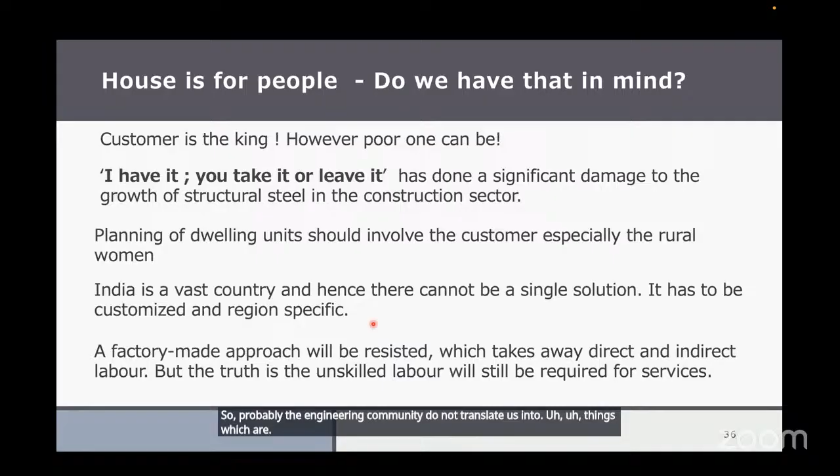Probably the engineering community does not translate us into things - I would say, the wall livability in this. Sir, look at here.

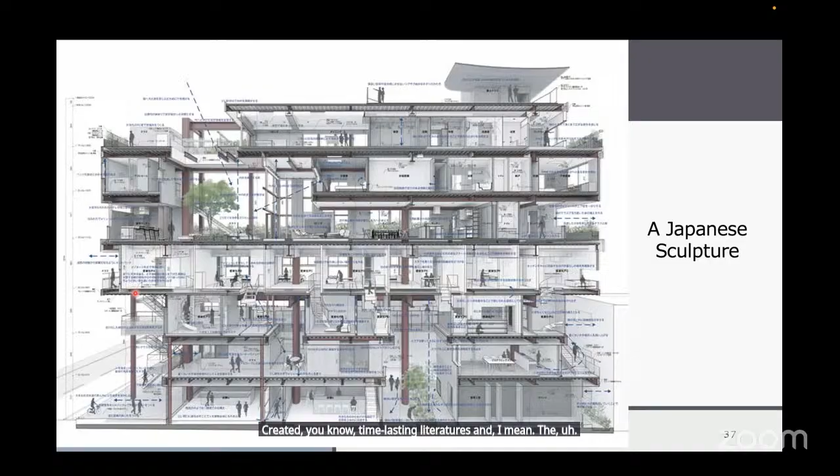So delicate, I call this a Japanese sculpture, sir. The thing I'm just really expressing is we are no less than Japanese. We have created time-lasting literatures, the Vedas and so many things for the world, but we are no less than other people.

But somehow we don't get and bring in the passion to deliver such things. So this is an example. I will call this a sculpture because it is really beautiful. All comforts, all safety, everything embedded. Still, it was a steel structure.

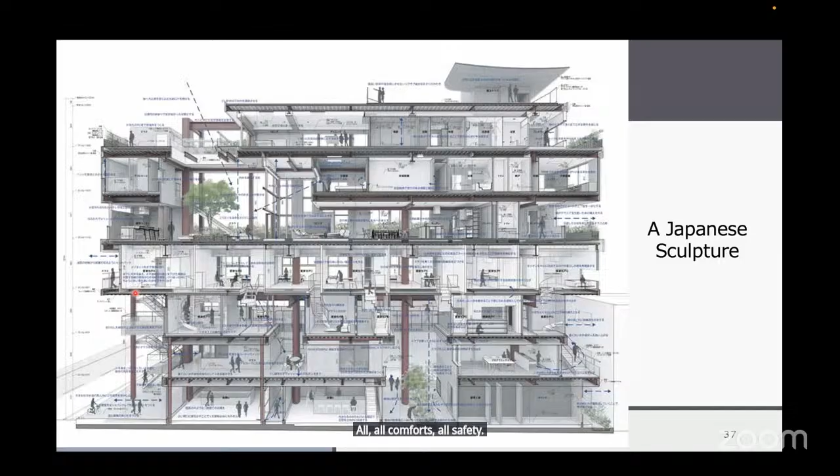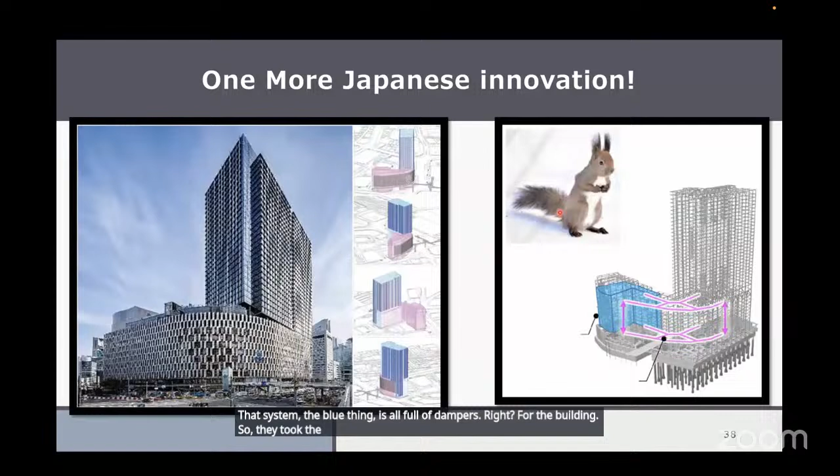Another one that really amazed me was a multi-story building, which is in an earthquake region. The blue part shown is an oil damper. That system, the blue thing, is all full of dampers for the building. They took the analogy of the tail of a squirrel. So they say this is the building, and when the squirrel tilts itself to the front, the counterbalance is given by the tail. It can put the tail in any angle it wants.

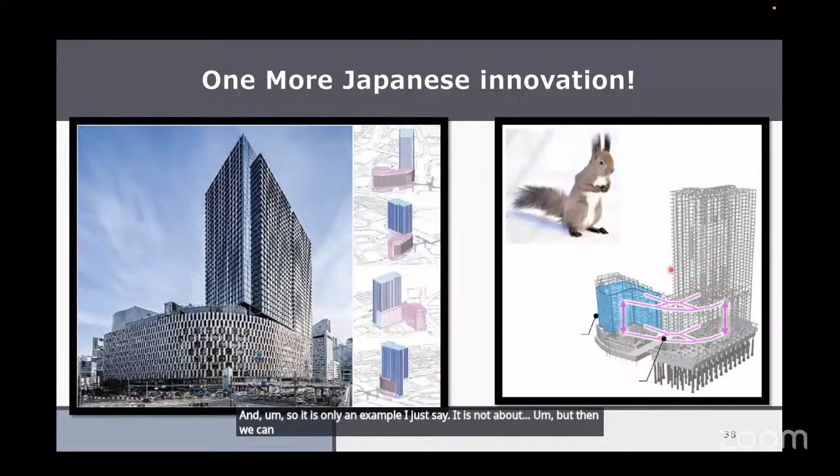Correct. So what happened now? See these oil dampers. This is completely a steel building, so it is only an example. I just say it is not about whether we can sell it. It is all about our imagination. Anyway, these two are my personal opinion.

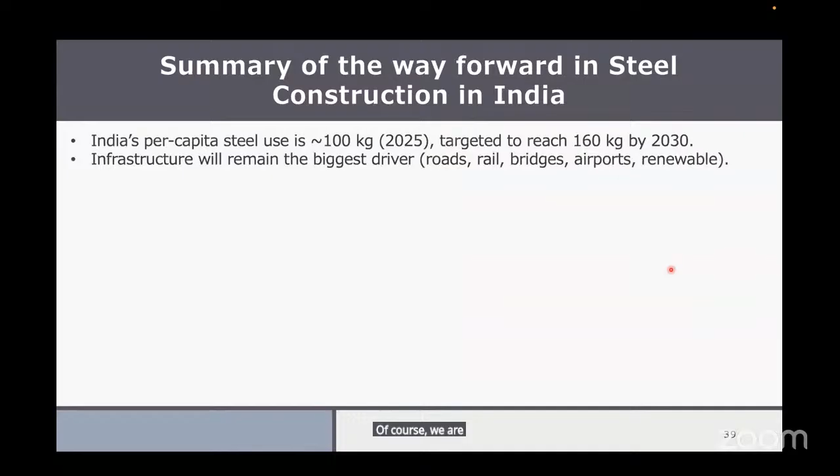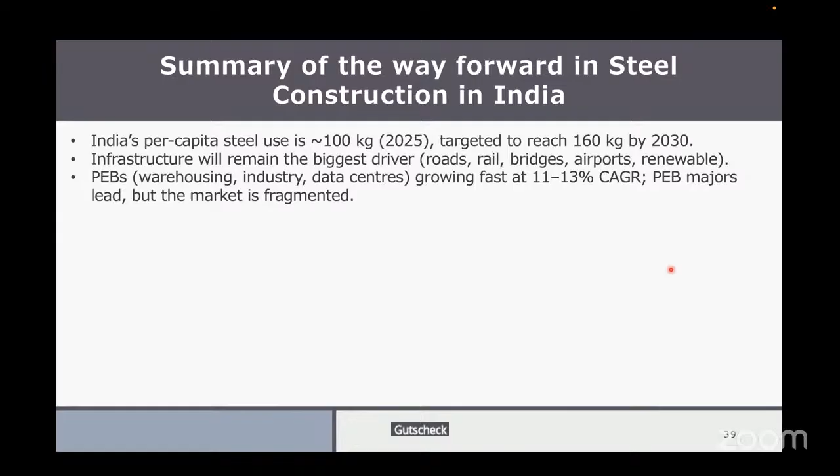And summary of my first part is, of course, we are targeted around 160 kg. The biggest driver is rails, bridges, airports, and renewables. The PEBs are really good for the seventh pillar of Gati Shakti, and they're growing about 11% compound annual growth rate.

All steel flyovers, scalable, quick-build solutions, it's for the people to decide. So also I would see airports are normal, but then the housing can be done in a very cooperative way. That is my hypothesis. So cold formed steel housing showed speed but lacked livability. New designs must focus on comfort, acoustics, and durability.

So illustratively, we can always say 4 to 5 million tons extra is the steel potential we have. And the last message I say is comfort and speed and sustainability, and just not material substitution.

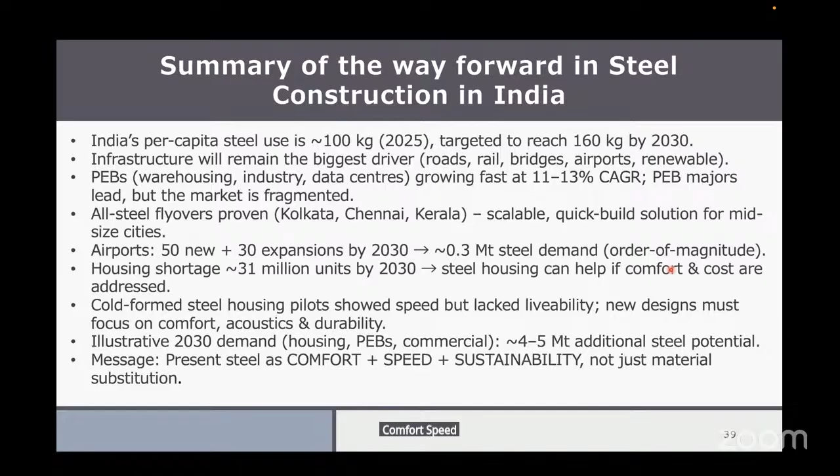Okay, so now the high strength steel part, I'm going to take only about 10 to 15 minutes. So when I studied, yield strength was always 250. When it came to 350, I said, what, 350? So when we did the project for the flyovers, we used 410 grade. Earlier SAIL had a SAILMA 410, but this is from a different producer, also 410.

So we could have some advantage on the cost, logistics, and these things. However, whenever there is a serviceability-controlled design, high strength steel was not that helpful. Like, for example, if you take a plate girder's deflection limit by span, it is span by 800.

So it's very difficult to get that, because when you go for high strength steel, your flanges are going to be smaller. Because the compression or tensile stresses will be higher, your section becomes small, so there will be lower moment of inertia. So you might get the strength, but it may not satisfy the serviceability. So span by 800 kind of deflections, high strength steel may not work.

But still, I have seen people using high strength steel for the flanges and normal strength steel for the webs. I've also seen those hybrid girders, but the only problem is the interface welding. When you have a dual yield stress welding, the fabrication has to be good.

So coming to the advantages, people see high strength to weight ratio, of course. Columns are slimmer, and columns use Fy in their equation, so the higher yield strength really pays, provided your lateral strength is managed with several other columns. So they say reduced tonnage, because of logistics, other costs, and lower embodied carbon.

The one point I'm just really very uncomfortable about, but sometime down the line we need to come and meet this, is better toughness and fatigue. In fact, high strength steels have a big advantage in fatigue. I'm also very impressed that if you take stainless steel, the fatigue behavior is very high.

So when you compare with normal steel, and what is the extra money you're putting in, the fatigue performance is normally ignored. In fact, in all these all-steel bridges, in some load cases, the governing factor was the fatigue of the anchoring bolts.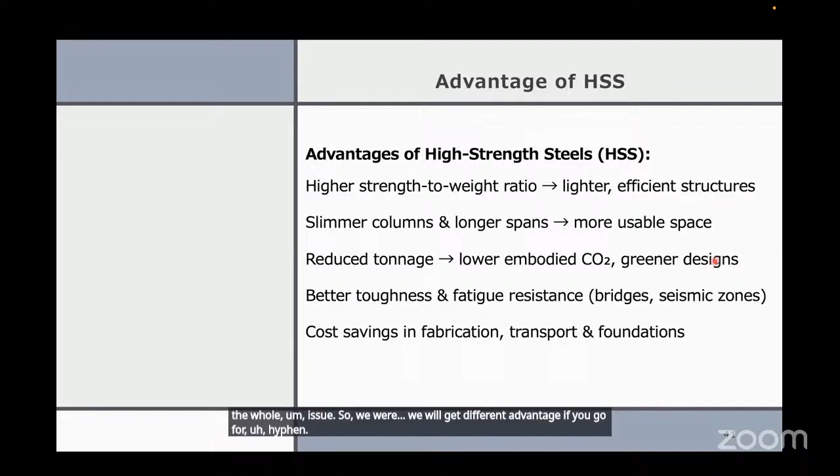So that was the whole issue. We will get a definite advantage if we go for high strength steel - there's a cost savings in fabrication. Now how is the world doing this currently?

Eurocode designs up to 700 megapascal, and they reuse the carbon metrics. USA uses up to 480, and they're researching up to 690 steels.

One of the things is we take a lot of our design provisions from Eurocodes. Many people criticize that we copy provisions from Eurocode. But in the absence of relevant research data, we can always adopt what exists and adapt it for ourselves. We are closer to Europe because Europeans have a resource crunch.

If you see European design, you will see a lot of tension in their design - they use lightweight cables, because for the money spent on material, tension members are the most efficient. So Europeans always go for a lot of stability checks in order to conserve material.

Whereas USA has an abundance of metal - in fact, people say this abundance was one of the reasons that really helped the Allied forces. So America is just researching 690, but in Scandinavian conferences I have seen people using up to 770, 690, and things like that.

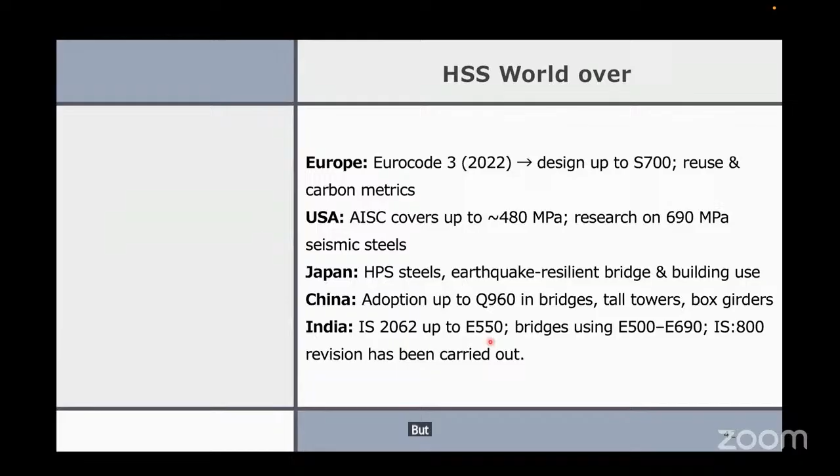They are using this in China too, up to 960, called Q960. In India, we go up to 550, which came in IS 2062. I'm not sure about quick adoption of high strength steels, but it is coming up.

Globally, it's usually up to 780. You can see from this yield stress that as the strength goes higher, the ductility of the steel is reduced. So what happens if you take 780 is you are losing the ductility that we had in our 250 steels.

So one of the things is the codes of practice methods will get changed, because we are now a country where we say minimum 20% elongation is needed. If you go for 550 and other grades, the codes of practice give some allowance for ductility - they say you can take up to 15.

Or they specify a ratio of Fu, the ultimate to yield stress. So something comes into the design so that your loss of ductility is accounted for.

Another very important thing for us is weldability, because when the steel is made, the welding also should have a matching microstructure. So there are people who do research in how the joining can be done for these new differential steels. And we are listed up to 550 in our code.

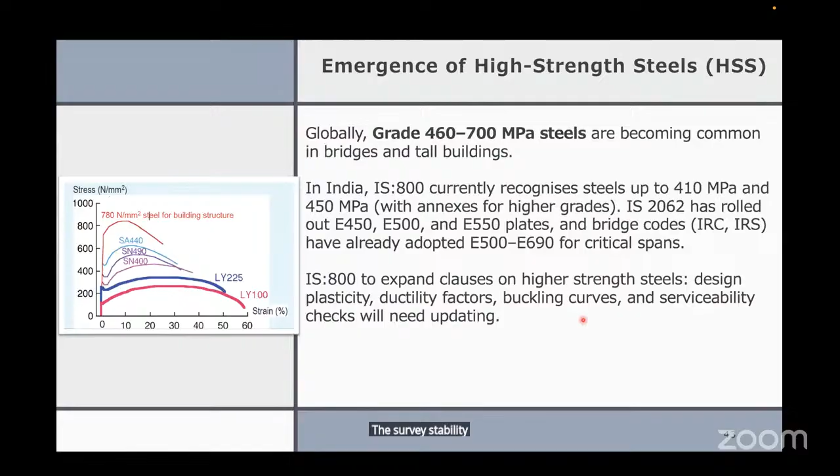What will happen is for higher strength steels, the ductility factors, plasticity, buckling, and serviceability checks will get a complete overhaul or updating. IS 800 is covered in a separate lecture - in one of the lectures I will give the new provisions of IS 800 versus the 2007 version.

I would also like to say why those changes are made. Many designers are a bit uncomfortable - as I told you, the Eurocode provisions take much more design office effort, with several calculation checks you have to make, but they're all part of the pains of development.

In my opinion, we are aspiring for something good, and on the way we have to re-calibrate ourselves to the codes. In the absence of technical data, we need to adopt what people have done, and the cart will follow the horse.

So you can see here the TMCP steels - these are Japanese made steels. They can go up to 1 gigapascal with a carbon equivalent where anything less than 0.45 is very good, nicely weldable carbon equivalent. So they got a highly weldable steel.

What will happen to IS 800, or what has happened to it? We are likely to mirror or follow the Eurocode second generation buckling code and curves, because the Europeans invested in 2007, we had the multiple column curves.

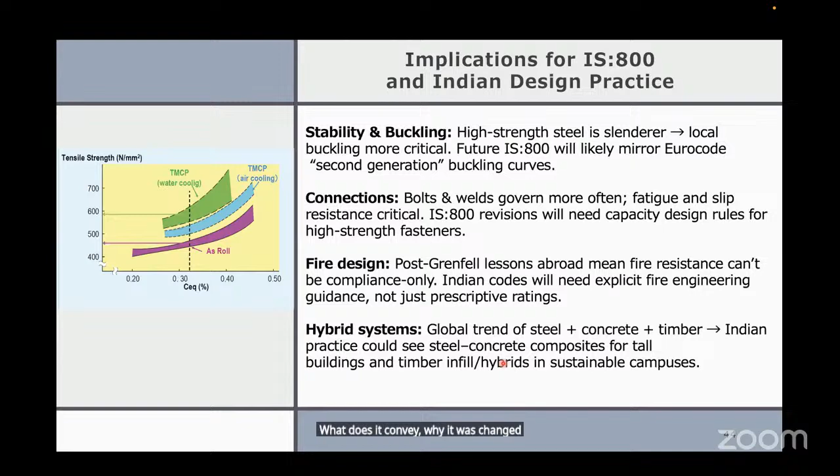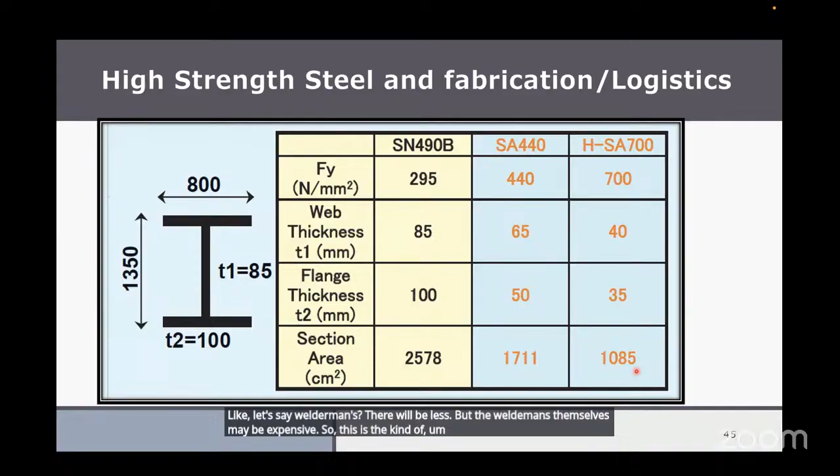So one of the things I mentioned, high strength steel fabrication - for the same design, you're reducing the sectional area if you go to high strength steel. Between 490 to 700 grade, your steel area reduces, say from 2578 to 1085 square centimeters. That means the amount of material you handle, weld, or put in place is less. The weldments themselves will be less, but the weldments may be more expensive. This is the kind of perception people take in adopting high strength steel.

Now, finally, before I close, I'll take a simple look at how the codes are going to change, because we are going to base things on the Eurocode. The first Eurocode design philosophy was a prescriptive check using the effective length method. Now we are going to have a performance-based method - something like the direct analysis method, which the American code suggests. That means codes in my days did not talk about analysis, and I was a student then.

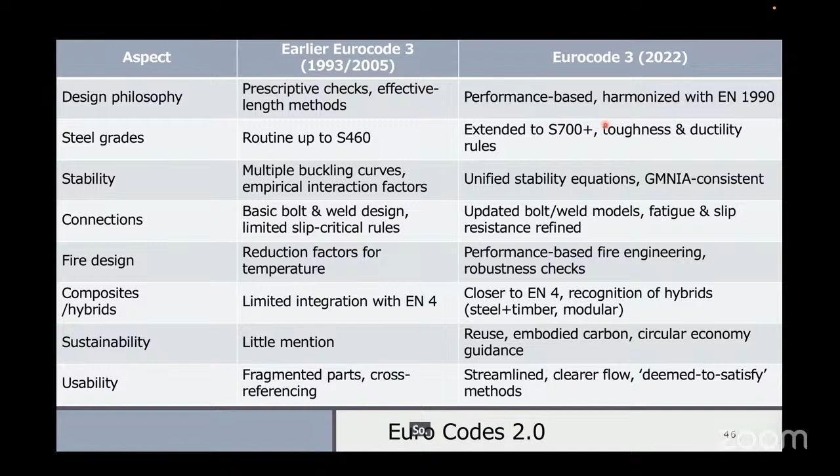The codes used to just say you do linear elastic analysis, but now the codes have started prescribing that you have to use GMNIA - that means Geometric Material Nonlinear Analysis. Things like that have come into the code. Harmonized with that, steel grades now go routinely up to 460. After that, there are several requirements for toughness and ductility rules.

In fact, you will find in tension member design, we are now taking a part of the weld also into our capacity calculation. That was very interesting research presented by a German professor, and it's being adopted in the Eurocode. So the strength of the weld that you need to design becomes part of your design equation itself. It's very interesting because in high strength steel, they are thinking part of the metal also contributes to that. So such things have come.

So we had multiple column curves, now unified stability equations which are GMNIA consistent - Geometric Material Nonlinear Analysis with Imperfections consistent. This is a big difficulty for many engineers in India, or the purists, or people like me. People call me old when I ask how you can expect a computer to do the design - they have no idea what's happening underneath. But people say it's a hard reality. Computers have come, people live with that, and we should take the best out of it.

To give the fundamentals, it's a different thing, but the way is turning towards that. Connections, we have fatigue and slip resistance refined because they have to serve large forces. Fire design had reduction factors for temperature, and now it's going to be performance based. Composites, or steel-concrete composites, is closer to EN 1994, Eurocode 4.

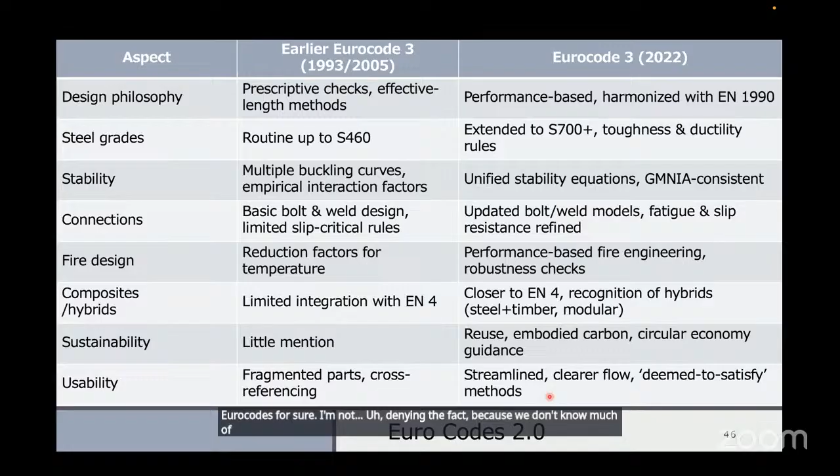So what I'm saying is, anyway, we are going to mirror Eurocodes for sure. I'm not denying the fact, because we don't know much of what is available. So this is what I would say, that we have high strength steels and things to come.

Okay, so I will take a few questions. I finished, I have some 20 minutes left, I left it for discussion.

So, my dear friends, first of all, thank Mr. Manas Ji. You have been so good to me, and I have worked with INSDAG for many years. In the fag end of my teaching career, I always share whatever I have. The journal, definitely we will do.

And I have 10 of my students who are live wires. I'm not doing a PR, my dear, it is all my students doing a tremendous job in the best NITs and IITs. So I want to empower them to take the mantle forward.

So I have three of my faculty in NIT Trichy, all three working on steel structures. And one in IIT Tirupati works on steel and fire. Of course, you all do that too.

I have got many in Roorkee, in Hyderabad, in Bengal, a lot of youngsters are there. So this is the time we need to invest our passion, money, and effort in all these young people. There are people from Bombay, they're doing what Guwahati IIT is doing. So several other people are there, and they should have a good union of this.